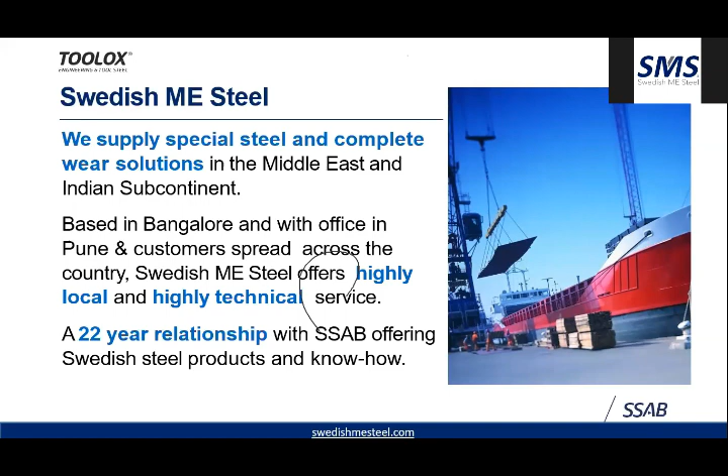Toolox is produced from a blast furnace, as you can see here, not an arc furnace. So the input material is not scrap, it's virgin material. With this input material and the stringent manufacturing capabilities the mill has, we are able to produce high quality pre-hardened tool steel. We'll see how through the course of the seminar.

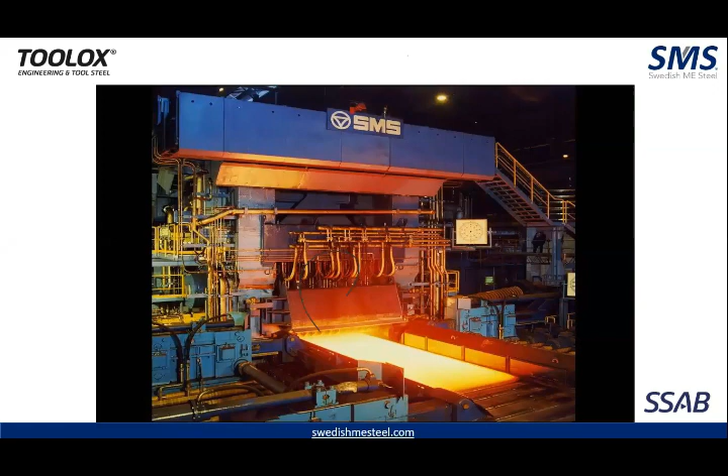Hot slabs come out of the rolling mill. This slide gives you the crux of the entire R&D of how the material is made. This is the quenching phase of the material. As you can see, from red hot condition, it changes to room temperature in a matter of seconds. So the metal is taken to a martensitic phase and quenched very rapidly, where they're able to achieve the unique properties of Toolox.

Toolox is a multi-purpose, ready-to-use engineering tool steel based on a high-strength, low-alloy concept. There are two different grades in the material, 33 and 44. Toolox 33 is a 30 HRC pre-hardened tool steel, and Toolox 44 is a 45 HRC pre-hardened tool steel. Both grades have a toughness value of 100 joules and 30 joules respectively. For the simple reason that you would not normally get a tool steel with both higher hardness and high toughness, that is the unique property we are trying to blend and give to customers so that it addresses all the high application requirements of each and every customer.

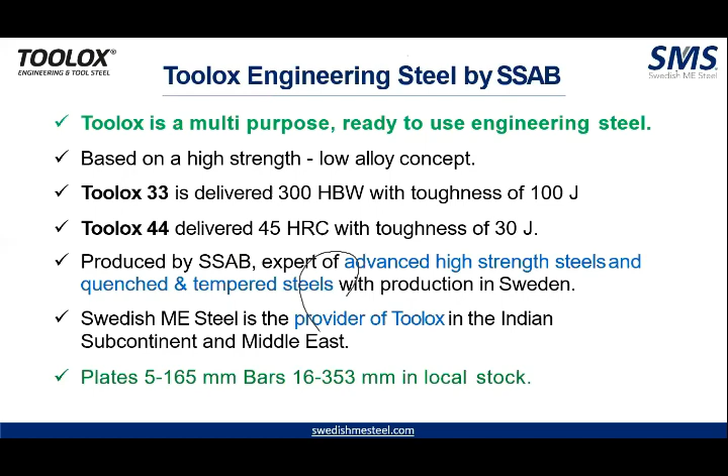So this picture will give you a rough idea what the material can use. You might have seen, heard, or used normal P20, high hard, D2, H13. Now you have only one grade of material with two different hardnesses, which if chosen rightly based on the application, you can use it as a multi-purpose steel.

You can use it in plastic moulds, you can use it in cold forming, hot forming, as well as various machine components.

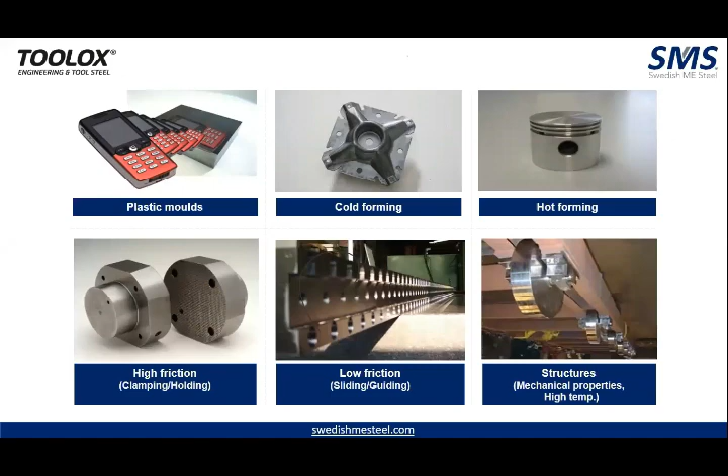With Toolox, you not only get, and this graph gives you an idea of how the milling speed and insert life has been calculated between Toolox 33 and a regular P20. So what difference does a Toolox 33 and regular P20 have?

In making Toolox 33, as I said, it has low carbon and the alloying element is very low along with it, so the carbides in the material are very less. Carbides have their own pros and cons. When we have low carbides, you are able to easily run your tool through the material.

So with whatever tooling you use for your regular P20, if you use the same tool, you'll be able to increase the milling speed of that tool by 40%. If you say, okay, I don't want to increase speed, my speed is fine, fair enough — you can keep the speed similar and increase your insert life when using the same tooling for P20.

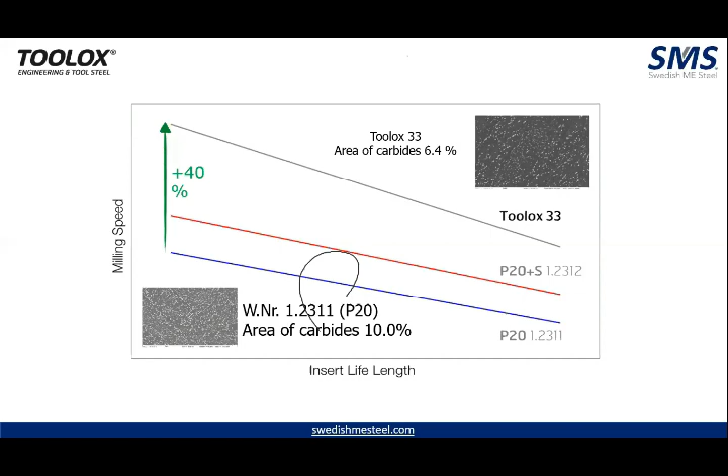So that's the question that Toolox answers in manufacturing. This graph again gives you the basic tenet which we are discussing in this seminar as a whole, that is, how it is going to reduce the manufacturing time.

You might have heard about pre-hardened P20 grade material, but Toolox 44, you can simply say, is a pre-hardened version of both H13 as well as D2.

So what you do with a normal annealed condition H13 — you take it, do all the rough CNC, fine CNC, then you need to heat treat it, then bring back the metal and do all the correction, then you need to do the programming again. That's not the case with Toolox 44.

It is delivered to you at 45 HRC. So there is only one programming, one set of programming, one set of CNC, and one EDM. When you calculate the total time from raw material to finished product, you would see that without taking the heat treatment time into consideration, you will be able to save at least 25 to 30% of your total time.

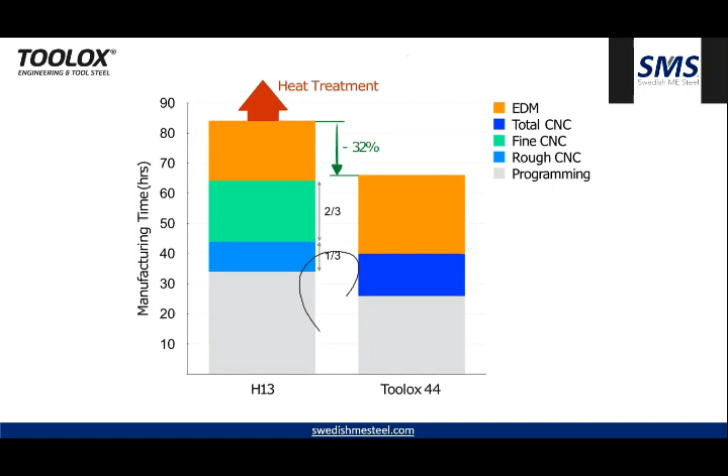So as I said, two different categories of grades, Toolox 33 and 44. Toolox 33 you can see is a replacement for P20 plus nickel, 2738. And Toolox 44 can work as a pre-hardened version of your H13 as well as D2.

But with Toolox 33, if you consider P20 plus nickel, ESR properties come as standard, which is not the case with a regular material. The alloying element, as you can see, is all low alloy material. Hardness being higher, toughness values are guaranteed — that's one important point you need to note regarding Toolox.

Each and every single bar and single plate is being tested, both ultrasonically, so whatever properties we give in the TC, you can be rest assured that the property on paper has come through in the material phase also. So we take a lot of pains in the testing of the material.

It's not tested for a whole block of 100 tons — each and every single bar and single plate is tested for all Toolox grades available. As you can see at the bottom, the carbon equivalent values of both Toolox 44 and 33 are less than 1, which means it is a material that will make maintenance people very happy. Not only for tooling requirements, but if you want to do any maintenance regarding welding or cutting, Toolox has the properties which will help make things very easy.

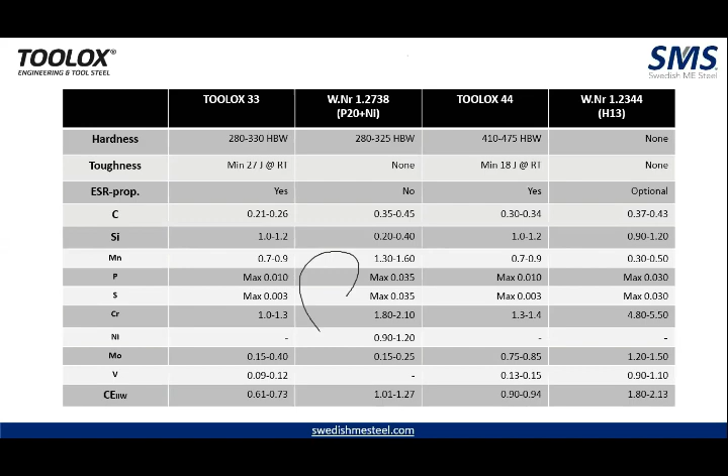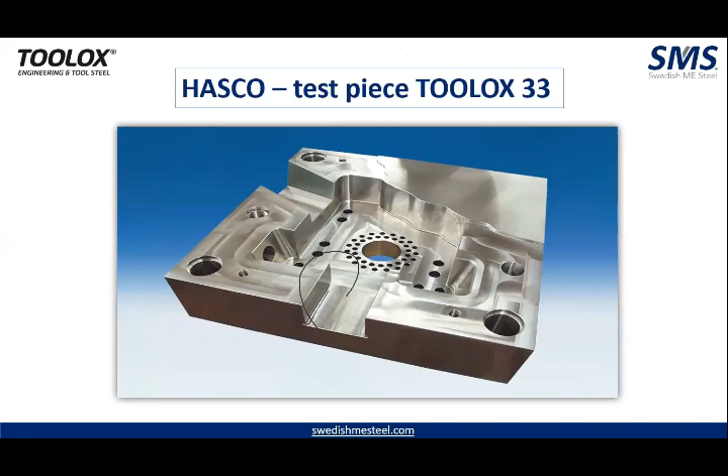This is a test piece done by Hasco. I think all mold makers here know Hasco, a prominent mold maker in Europe. You can Google Hasco and Toolox, and you'll see Hasco has recommended Toolox in their own brochure. They took this piece and compared it with regular P20 material. What they found is, even though the input cost is 30 to 40% higher than regular P20...

The total cost after 70 hours of machining, they concluded, shows a saving of at least 20% with Toolox 33.

How exactly does it do this? Thanks to the ESR properties, there are no hotspots in the material. Even with big blocks and extensive machining, there's no stress relieving needed, and grinding is very minimal since you go straight to finish machining.

So the total costing is, even though the input cost is 30 to 40% higher, the total cost for manufacturing that same piece is much cheaper when you compare with Toolox 33. That is the kind of help or aid the material gives tool makers.

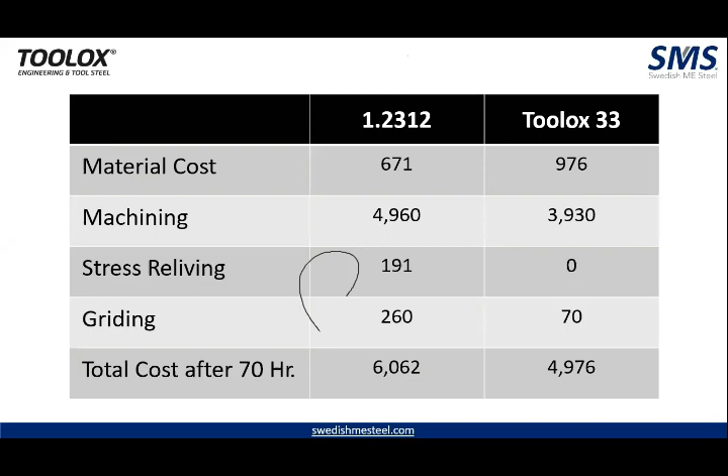Hasco has also done measuring of Toolox 44, because whenever we tell customers about Toolox 44, there's a common question: okay, it's 45 HRC material, how will I do the machining, the drilling, the tapping?

Yes, the properties of the metal are very good, but if you use the right tooling and parameters, which we'll show you during this webinar, machining Toolox 44 is not a big issue. Testing shows milling at average speeds for hard milling is possible, and the material behaves very well during drilling and thread milling of Toolox 44, showing only very low tool wear.

Even long hole drilling is possible. The test piece was absolutely stress free - that's the beauty of the material. There are no internal stresses in the material itself.

So even when you machine the block of Toolox extensively, you'll find that all the stresses generated come out in the form of chips. Nothing remains in the material, so even after extensive machining, stress relieving is not required.

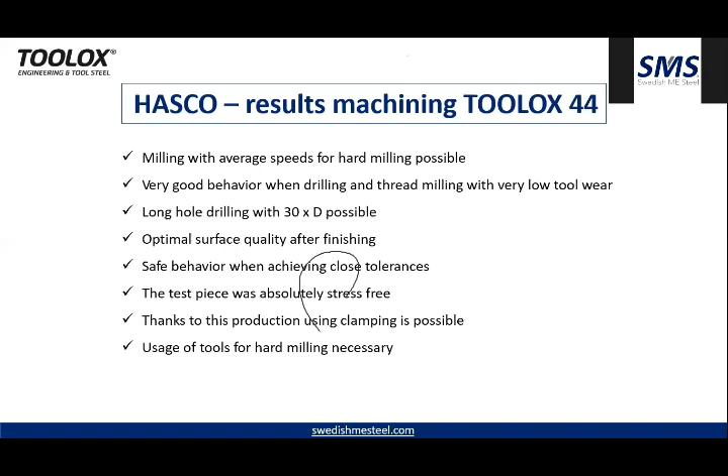So now we've talked about how the metal is manufactured. I hope you have an idea of how it's made and how it will be useful for you. Now we'll delve into the plastic molding section, showing how the metal is used for various engineering plastics and across the globe for different applications.

Let's move on. So what grade to choose in molding? This tabulation covers different types of engineering plastics you normally use in production and what grade of material you need to choose. For example, if it's PP, Toolox 33 is more than enough. If it's ABS, Toolox 44 is more than enough. If it's glass filled fiber, then you need Toolox 44 plus nitriding. Depending on your application and the volume expected from that mold, you can choose the respective materials.

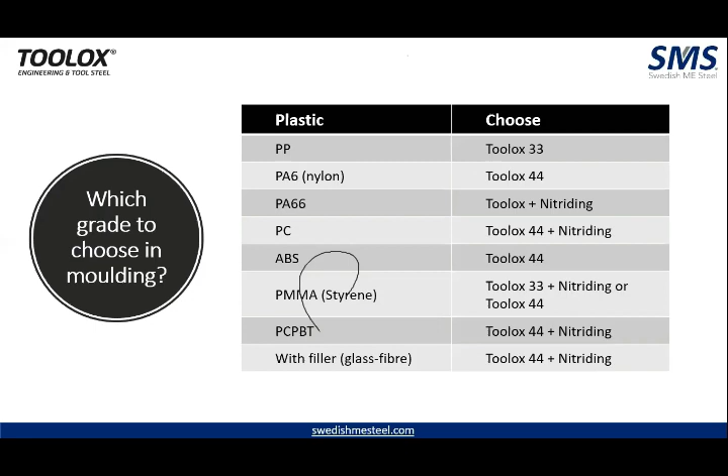Surface engineering - okay, you may ask me: Toolox 44 comes at 45 HRC, but my mold or inserts require 50, 58, or 60 HRC. What should I do? Can I not use Toolox then? No, that's not the case. That's how Toolbox is used.

Toolox is a very good engineering substrate for all kinds of surface treatment. So at 45 HRC, you can do nitriding, PVD coating, induction hardening, as well as laser hardening, which is an upcoming technique in the automotive field. With nitriding, you'll achieve 58 to 62 HRC.

PVD coating can achieve 70 plus HRC. Induction hardening can achieve 50 to 57 HRC, but the added benefit is you'll achieve a case depth of 3 to 5 mm. So whatever your surface treatment requirements or hardness requirements for inserts, you need not worry - Toolox will handle it without any problem.

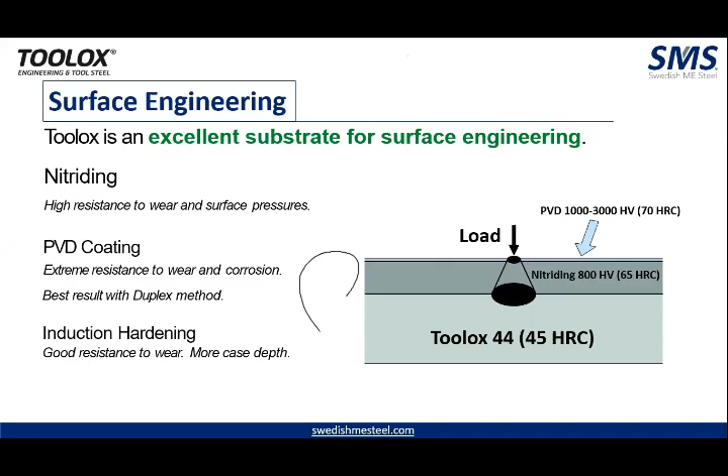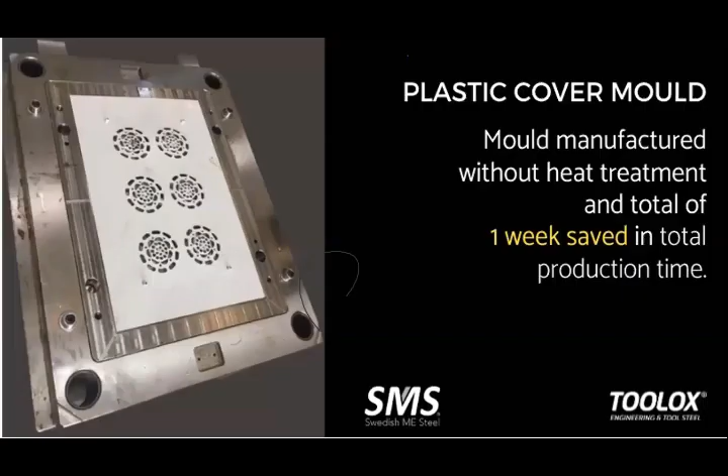It's a plastic part that's been made. You can see the part being very big and long. Here the number of pieces required is only 5000 to 10,000. But the closing force of the injection press is 300 tons, and the weight of the component is also heavy, close to 500 grams. So whatever applications or restrictions you have, whatever you feel your material is not able to adhere to, Toolox 44 comes in handy with all the required things.

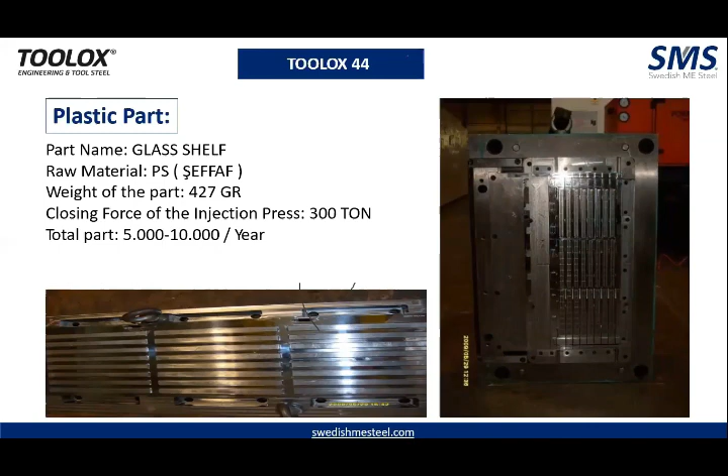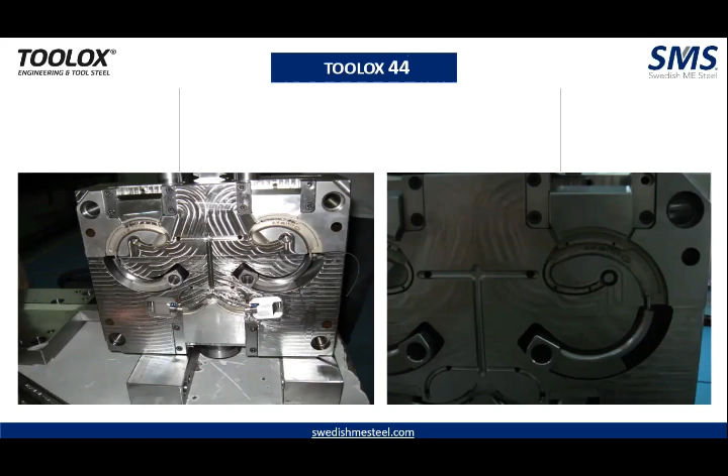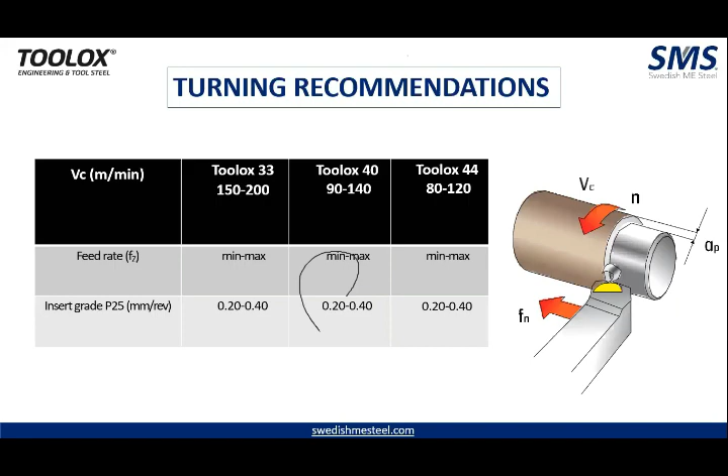So we'll see some of the machining parameters of Toolox. SSAB along with SMS have made a complete tooling recommendation for Toolox material for different grades, what kind of inserts you need to use, which manufacturer you need to use for optimal results. We can share it with those interested at the end of the meeting. It's a complete booklet which gives you complete data about what values you need to use to get the best results. It has given both minimum and maximum values, so you can do trial and error within those values and come up with your optimal values.

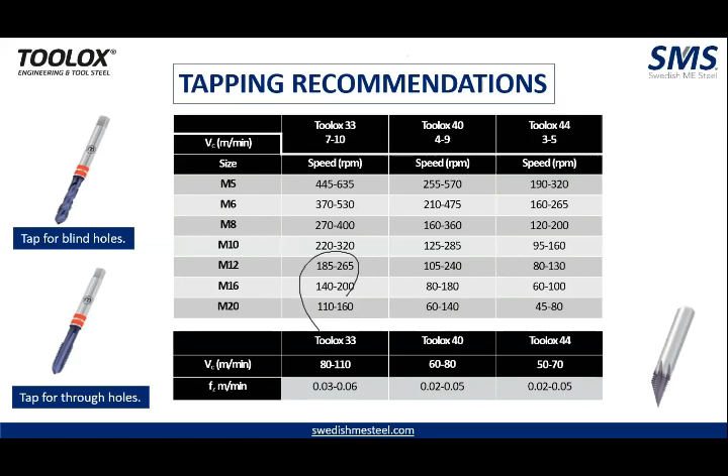Tapping recommendation: for both blind holes and through holes, we have the recommendation. But tapping is recommended only for machine tap, that is from M5 to M20. Anything below M5, we don't recommend machine tap. We recommend thread milling for anything below M5.

Some tool recommendations for Toolox drilling. When you see this, you might think, okay, these are all expensive suppliers. These are only recommendations from our side to give you an idea that drilling various kinds of metal is very much possible with Toolox. You can just ask your present tooling supplier to give you anything equivalent to this grade, and they will be able to provide it, because we also understand the concerns of the customer. We have worked with many customers in India also, wherein we have come up with local solutions. Though we don't recommend hand tapping, I think that's the thing with most customers, so we have even found a solution for hand tapping with Toolox 44.

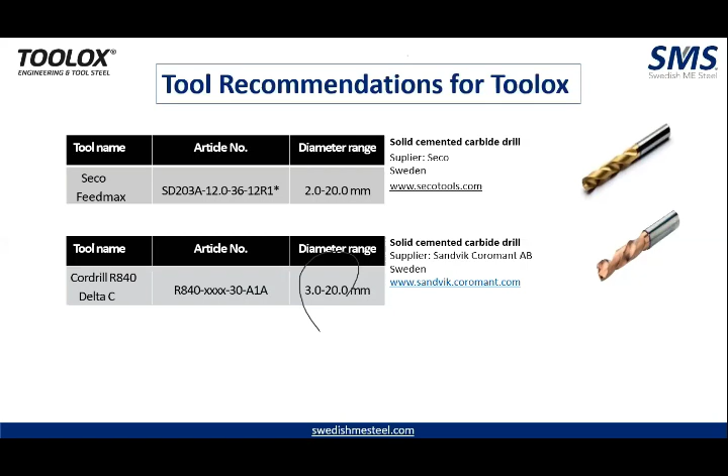High-speed milling is also possible, as you can see. The insert lifetime is 180 minutes in this. The volume of chip removed is 160 square centimeters per minute. Even when you do extensive deformation and extensive machining, the deformation is very small, less than 0.1 mm on flatness. Even after extensive machining, the surface quality is so good that even additional polishing would not be required.

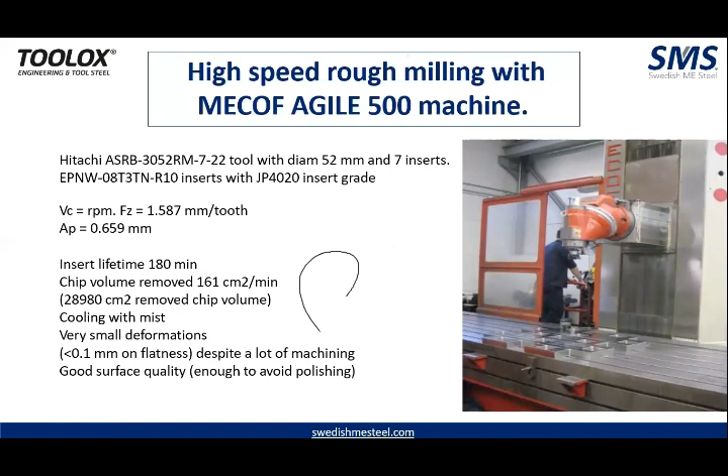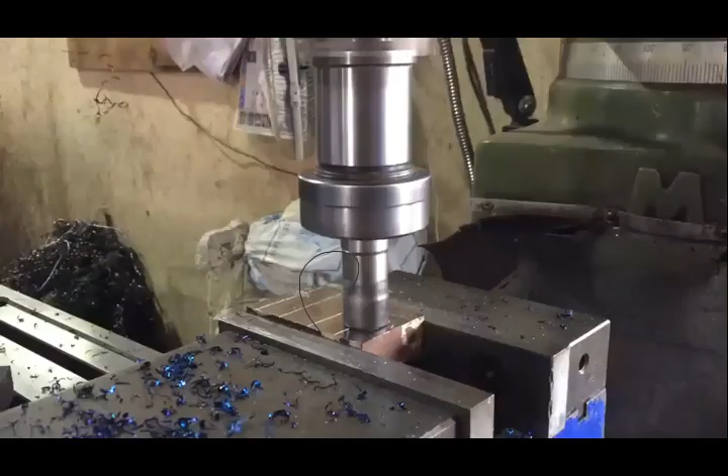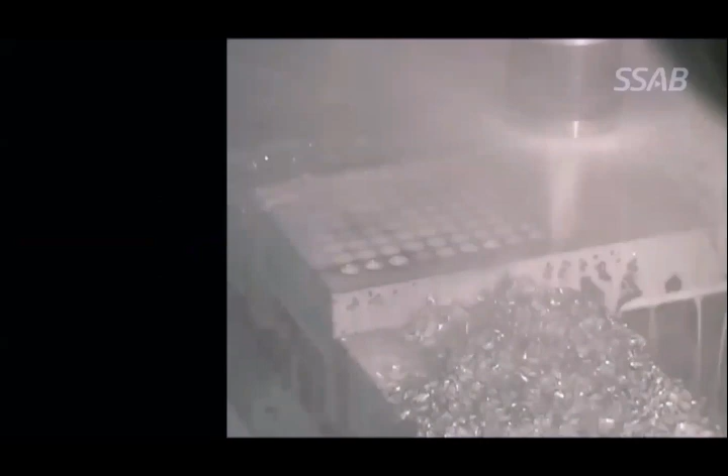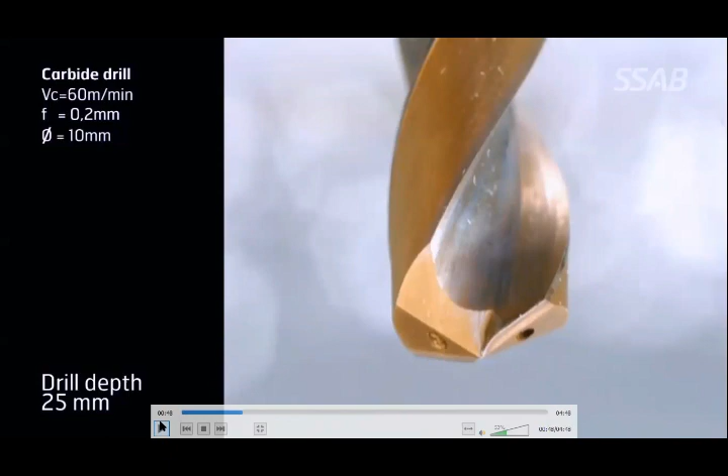So I will share you one video. As you can see, the drill depth being 25 mm, carbide drills have been used here. When you use the right tooling and parameters, machining of Toolox is absolutely no problem. Even long hole drilling is possible.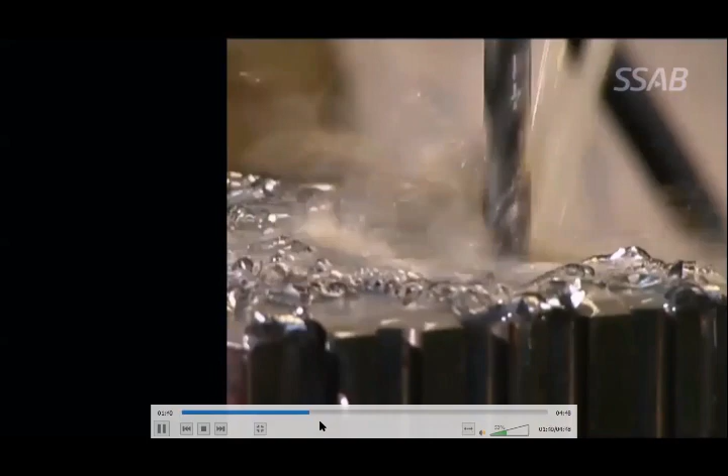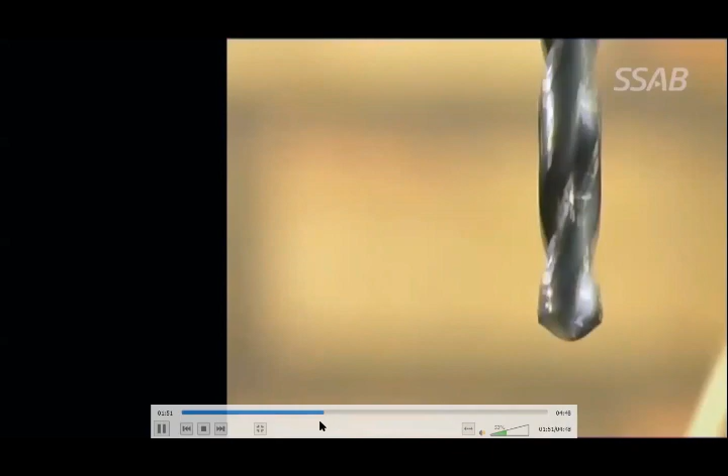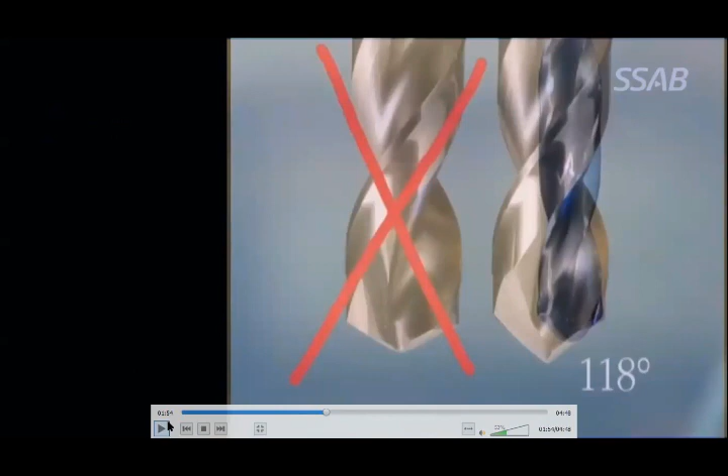This is one thing you can try to do with Toolox 44: instead of a 120 degree angle on the drill, you can grind it to 118. Drill depth for this is 230 mm.

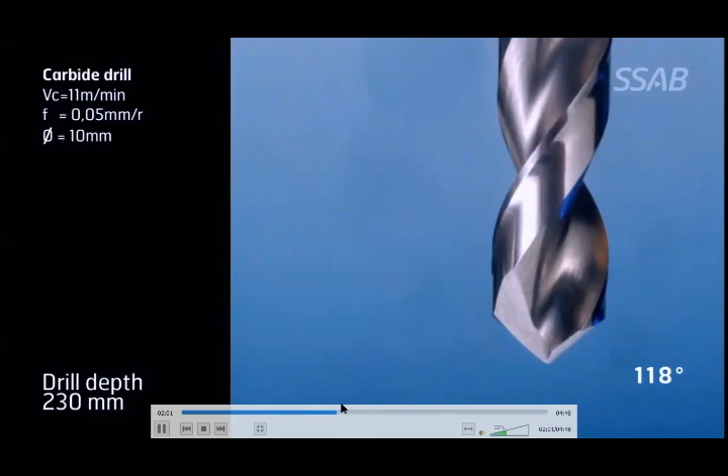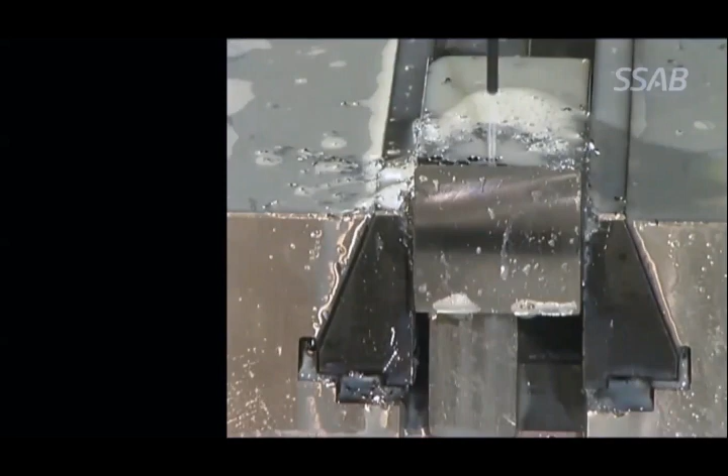Even small and complex holes can be made. This video will give the demonstration for that. As you can see, even small holes with absolute precision can be made with Toolox 44. Absolutely no problem regarding the hardness of the material.

This is fast milling. You can see how fast the milling is.

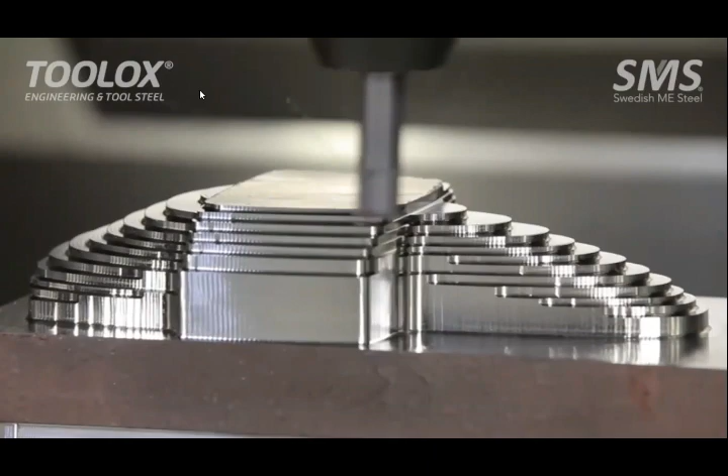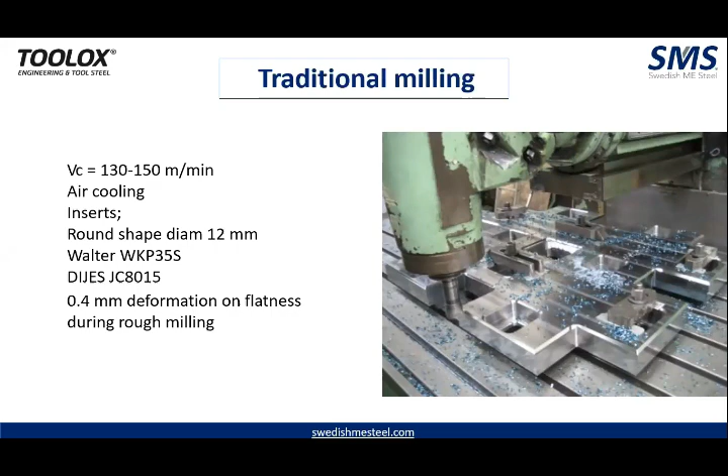So that was a video which demonstrated the fact that Toolox 44 drilling or tapping is absolutely not a problem. So for those who are saying that these are expensive materials, expensive machines being used to bring about these results, this is some of the trial that we took in the machine shop.

You could see the chips being very bluish in color, what's been given.

So as we have completed with the machining parameters and various activities on how the drilling and tapping is done, let's now delve into how Toolox can be used for cold forming applications. Toolox is a very interesting metal, like any other application, but particularly for press tools, it can address the issues faced in different areas. We'll see one by one how it is going to help you out.

So this is Toolox used in a cold forming die. As you can see in this particular picture, SSAB's Toolox cleanliness level is very, very superior and almost equal to or even less than ESR grade steel. As I said in the beginning, Toolox 44 is a pre-hardened version of your cold working tool steel, a pre-hardened version of D2, which is available at 45 HRC. That's the new mantra with Toolox. How are we able to achieve this? The world-class metallurgy makes it possible for SSAB to produce tool steels with a cleanliness similar to the high-quality ESR tool steel. It's possible to combine both high hardness as well as high strength material, which in turn gives you greater benefits like crack resistance and absolutely better machining properties when compared to traditional tool steels.

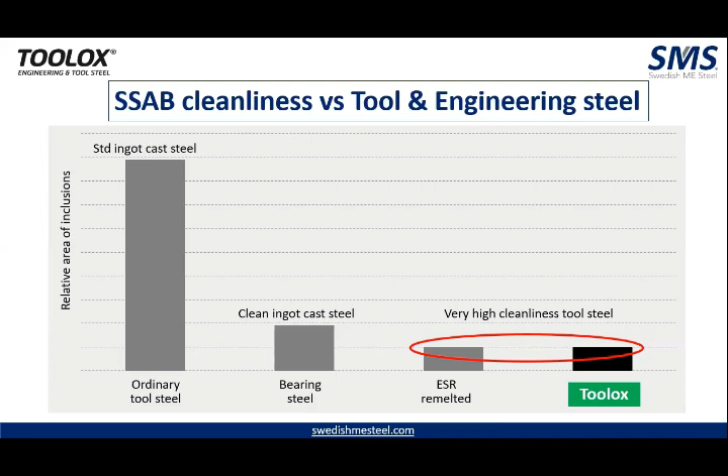So as I said, Toolox can be considered a pre-hardened version of D2, delivered at 45 HRC. The toughness guaranteed is 18 joules. You couldn't find any D2 metal that gives toughness as a guarantee. For those asking what they're going to do with toughness, in what way it's going to help them out - as I've deliberated earlier, the higher the toughness value of the material, the better its ability to resist cracking of the die. So if your die has been made with Toolox, and if you're having cracking issues in your previous die, Toolox 44 can immediately address this issue without any doubt.

It's a low alloy material, and once again the carbon equivalent is less than 1 for Toolox, which is 4 times higher for D2. This in turn helps you in easy maintenance of the die, and thermal cutting is also possible.

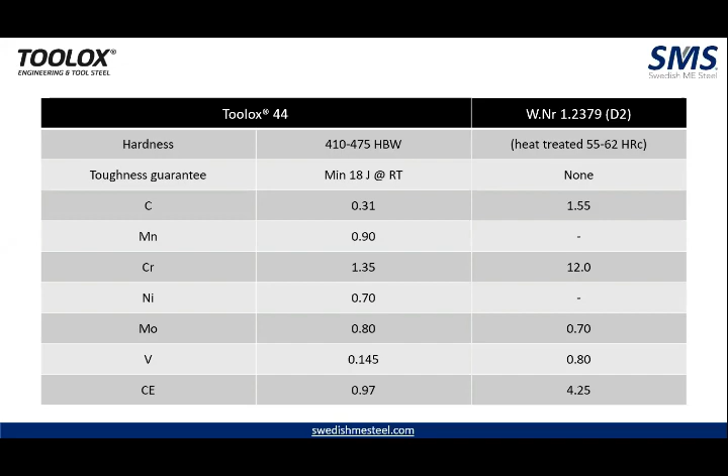Since the surface depth you achieve through induction hardening is 3 to 5 mm, that gives you much better wear resistance compared to even nitriding. So if you cross more than 10 mm, up to 15 mm, you can again use induction hardening, whereas nitriding and PVD are not recommended.

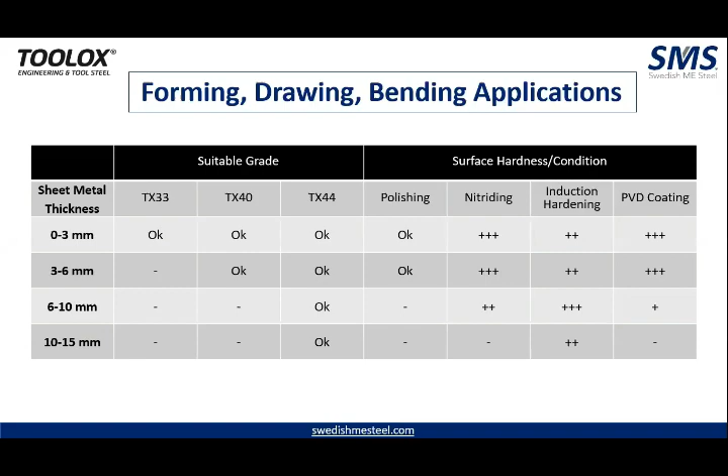This is an interesting application that we did with Toolox. It's also close to my mind, as this was our first major project that we did for an OEM. As you can see, this is a two-wheeler fuel tank die. The previous solution was casting plus chrome plating. One issue they faced, not in tool making, but in production, was that after every 50,000 to 80,000 shots, you need to recoat your die made out of casting. So with a die life of 1 million shots, almost 10 to 15 times the die had to come out of the manufacturing plant to the nearby city for coating, with 2 weeks of production loss every time the die came out.

With Toolox, it was a single monoblock. The weight of the tool was 1 ton, and as you can see, we have scooped out almost 500 kgs from it, with no distortion. We have done nitriding at 550 degrees centigrade with no problem of distortion. We were able to match it and put it into use. So Toolox 44 plus nitriding, last we heard, has run around 5 to 6 lakh shots without any recoating required.

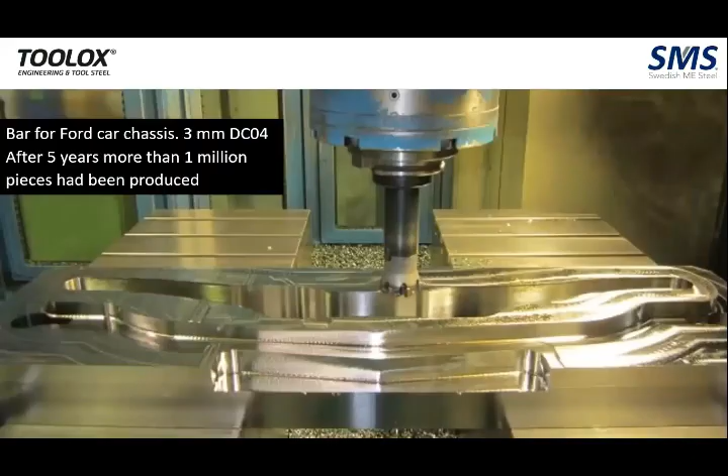So another example for Toolox. This is an interesting case wherein 1 million parts have been produced over a period of 5 years, which speaks volumes about the longevity of the material. Adding to that, this is a single piece monoblock. If you want to manufacture a similar die with D2 or any other cold working steel, I'm sure you'll have to segment it into 5 or 6 different pieces, meaning 5 to 6 different times of machining, programming, designing, and commissioning, which is also an added cost. Why spend extra when Toolox can address those kinds of issues?

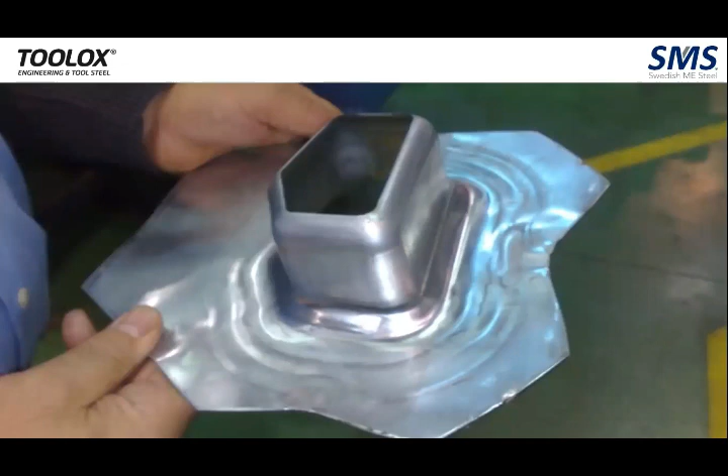The corners, the fatigue cracks, whatever usually comes with regular metal, can be addressed with Toolox 44 without any issues.

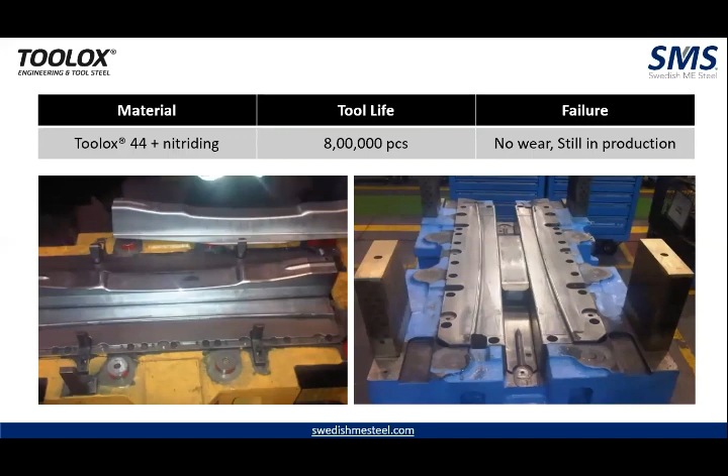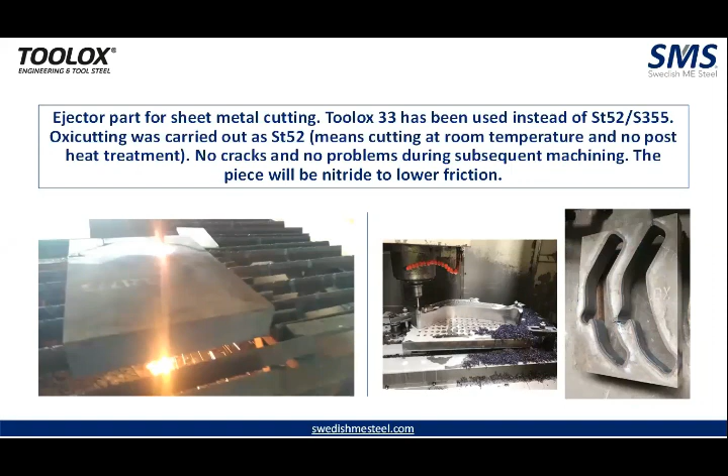One more application of monoblocks on both ends. So Toolox 44 plus nitriding, 8 lakh components we have produced. No wear issues, and it is still under production. This is an interesting part where the material properties can be used.

As I have been saying all along, the carbon equivalent of Toolox 44 is very, very less, which means that both the...

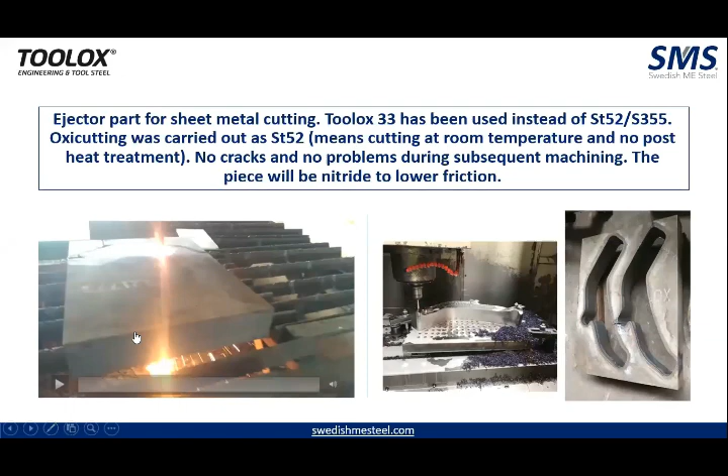So this is a Toolox 33 block, which has been gas cut just like that. If you have any profile of inserts which need to be manufactured, you can directly go for profile mix, and you can just machine out the heat affected zone. Then your piece is ready, with no cracking problems.

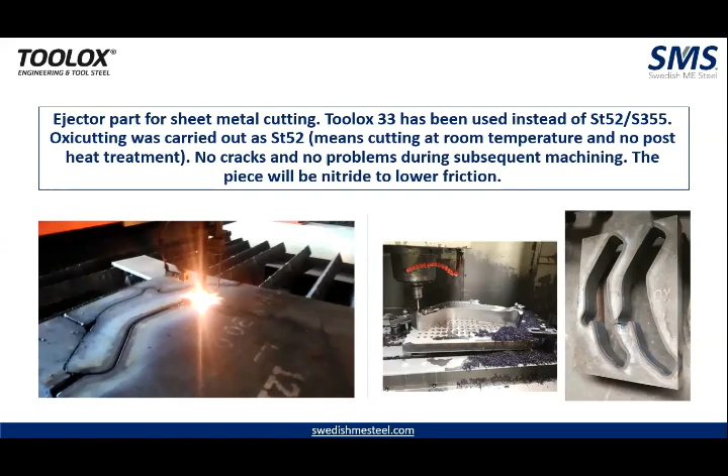Subsequent machining can be solved, and you can think of the kind of manufacturing time that these kinds of operations can save you. Directly go for plasma cutting, directly machine it, and your insert is ready. And this is the component which has been made.

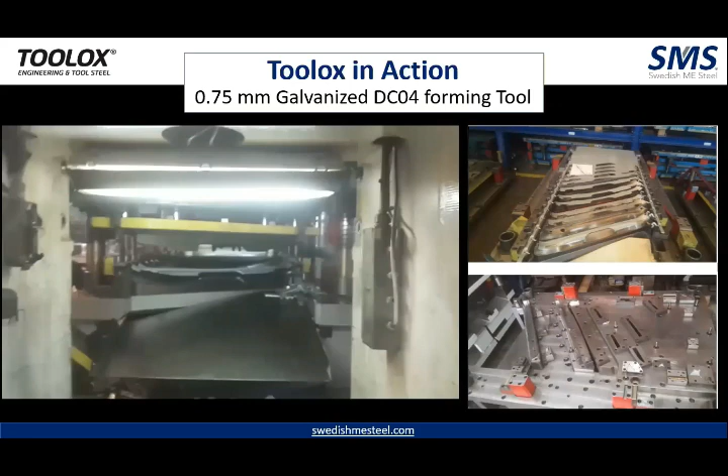So one more application for you: a progressive die, 0.75 galvanized.

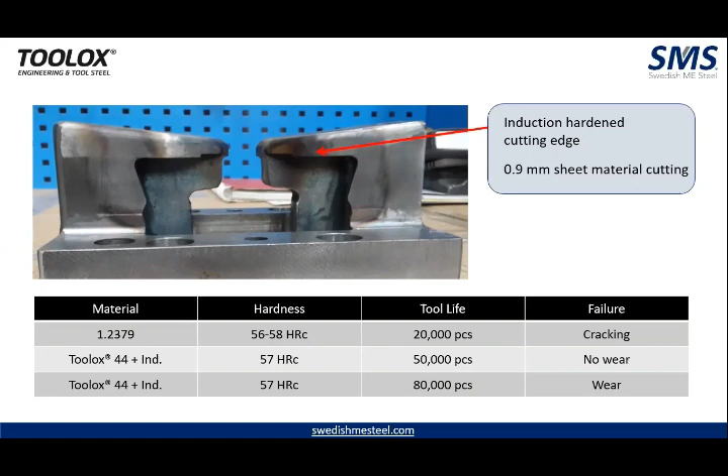Then Toolox 44 along with induction hardening was roped in. Up to 50,000 pieces, no wear. Even up to 80,000 pieces, it went on well. But at 80,000... pieces there was a failure mode, but it was only wear, not cracking. So again, I reiterate, any issues that we have with cracking with any of your current material, then Toolox 44 is an absolute friend for you.

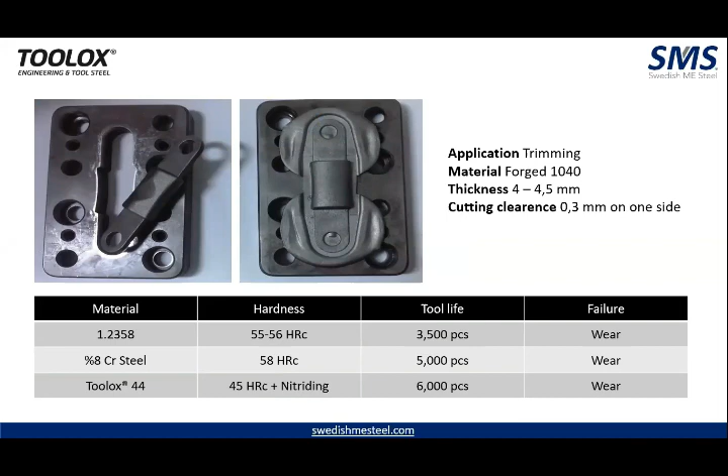Again, trimming of forged material, 4 to 4.5 mm thickness. Even expensive metal were used, and they had faced an issue of wear. Compared to that, Toolox 44 plus nitriding gives you much better life than your regular items. These are some of the components which we made using laser hardening.

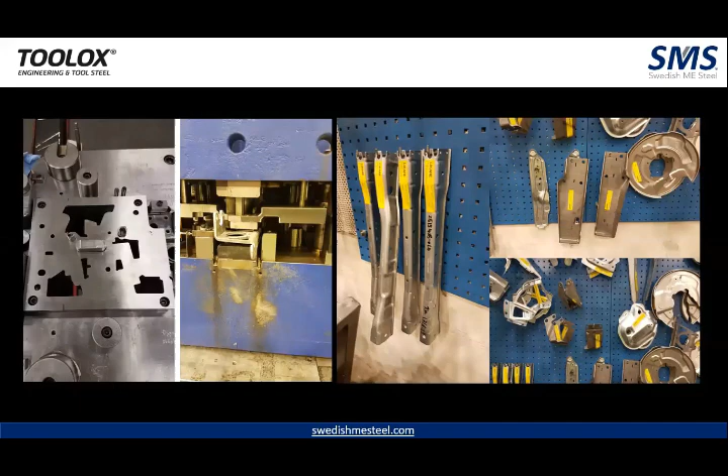So this is an interesting piece of information: this is a cutting die, wherein the sheet metal thickness was 8 mm and 800 megapascal. The previous metal was Vanadium 4E. These are the components manufactured out of that. What they faced was that even with the expensive metal, for every 20,000 shots, they needed to regrind it.

But with Toolox 44 plus laser hardening, you could achieve 60 to 62 HRC with a case depth of 1 to 2 mm. We have done almost 1 lakh shots without any regrinding, and that's a big benefit for you.

We also have some laser hardening facility available in India, so we are working closely with them. And so far, whatever we've worked on, we've been able to get more or less similar results to what you have got globally out of laser hardening along with Toolox 44.

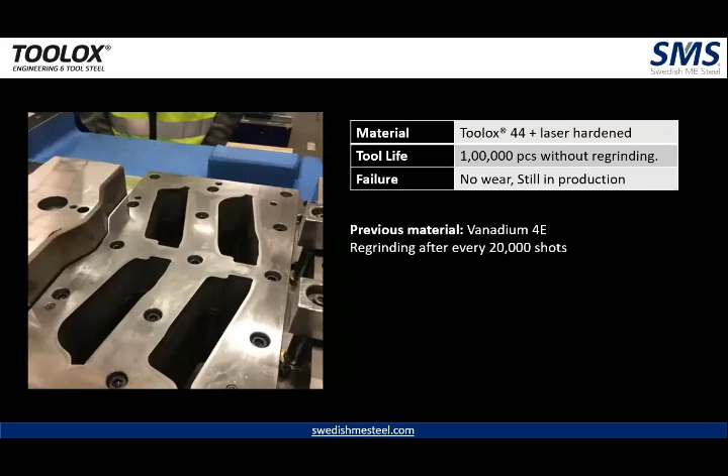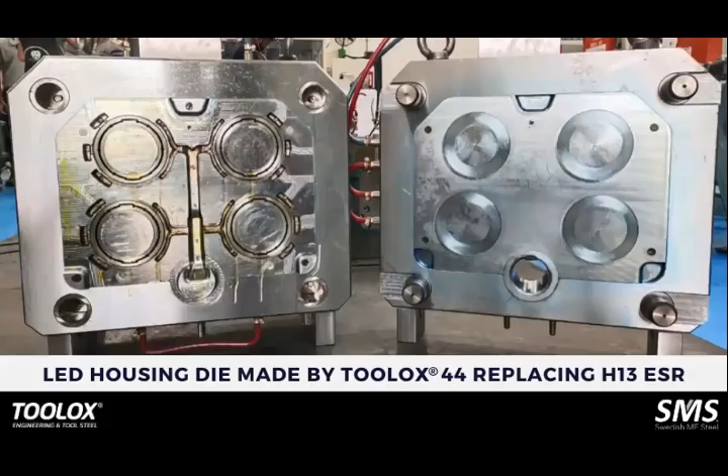As I said, it can be used for die castings also. So die casting along with every other machine component can be replaced. This was a die made in India; the previous metal was S30 ESR, replaced by Toolox 44.

So we have come to the fag end of our webinar. If I need to sum it up, these are our key takeaways. From the webinar, you would have now come to a conclusion about the kind of quality and stringent measures that we take to produce this high quality steel.

For every tool maker, you have a material not only for your regular P20, but even if you're using high grade H13 or D2, there is no need of heat treatment. So you can save your money and time. You would have known about the pre-hardened version of P20 being available, and now you have a good idea about the pre-hardened version of H13 and D2 being available. Since it has multiple specialities and properties with high hardness, toughness, and strength, it can be used for multiple applications. We have also discussed various case studies from across the globe.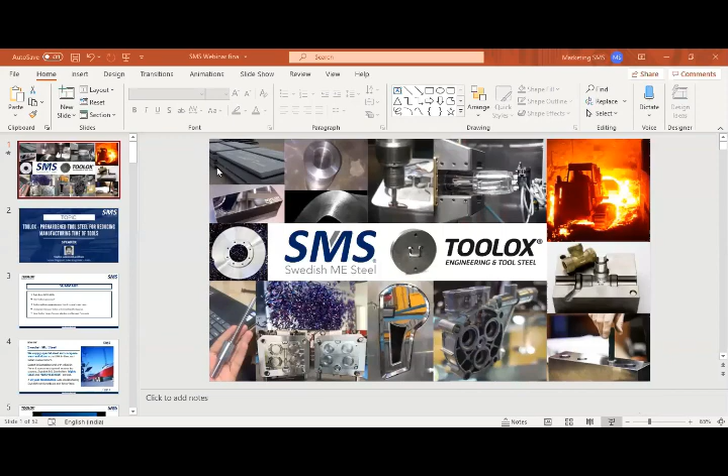Does Toolox easily allow chemical etching or the etching process? You have one picture study in the beginning which shows the etching capability of Toolox. Because of high microcleanness and also homogeneous structure, we can make chemical etching easily.

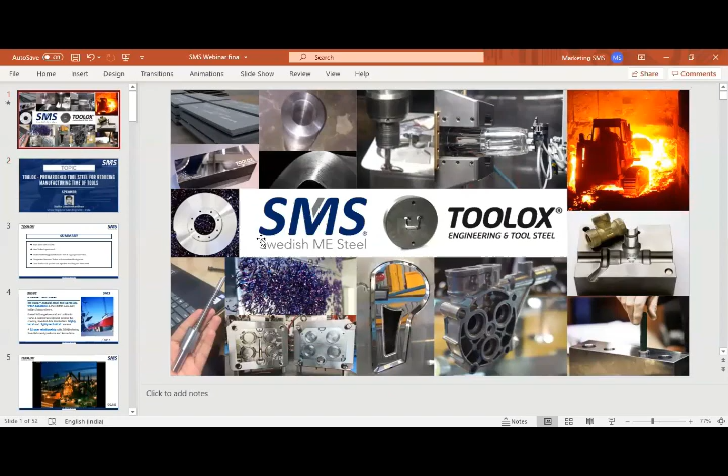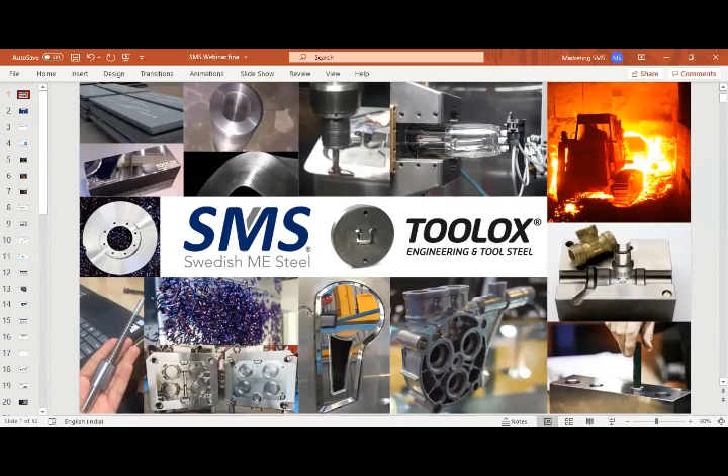Okay, that means the chemical etching process required is the same as for other steel which are harder. Yes, you don't need a special process, you don't need to be too careful for this. No need to change the chemical composition or concentration. Most of our customers compare it with H13 or P20 high-hard, and they use the same procedure, nothing special.

Thank you. And sir, where is this laser hardening process available nearby? It's available in Pune, sir. There is one center for laser hardening. We are undergoing testing, we can share details with you, sir. No problem, I will get the details from Madan. Sure, sir. Thank you.

There is one more question from Mr. Mohan about round punches. As I had said in the webinar, Toolox 44 is available both in rounds as well as flats. Rounds start from 16 mm up to 353. What we have in our Bangalore stock is 16 to 200, readily available. All bigger sizes will be against order. Our production range is from 16 to 353, but what we have in India is 16 to 200 mm.